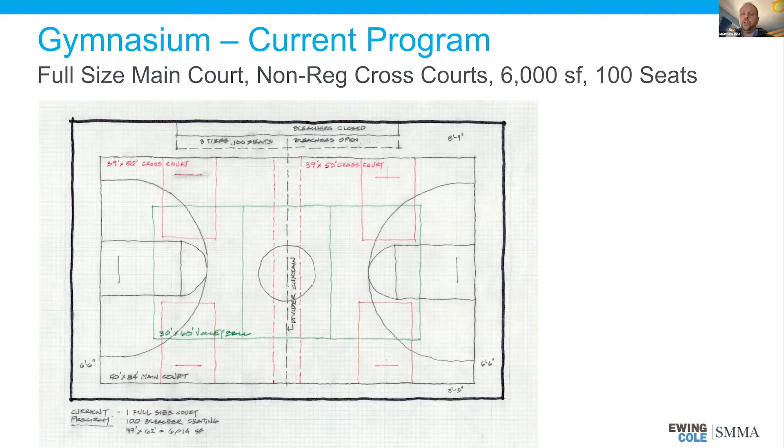So if we just advance through, there's a quick overview of the diagrams of those particular gymnasiums. Again, this is the baseline gymnasium, just so you have a visual—one main court for both volleyball and basketball, as well as some seating. The next option was an 8,600 square foot gymnasium with 2 courts, neither competition on the cross courts, with bleachers included. And the third option, as drawn, has 2 main competition courts with seating on either side for viewing of those side court competitive activities.

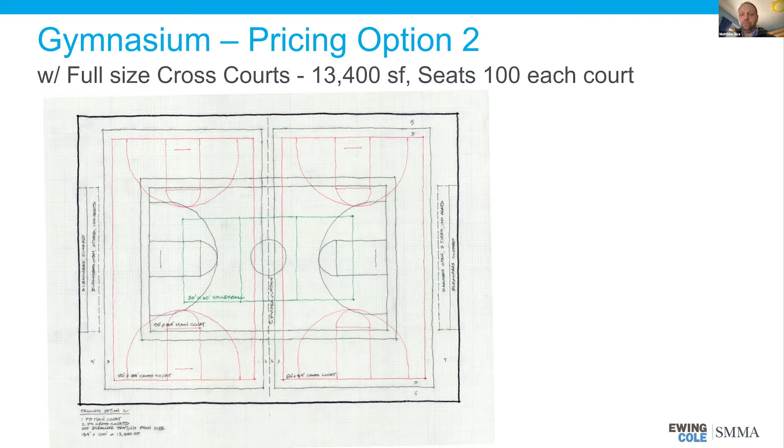So the second pricing option we are going to be holding through the estimating process is the auditorium space. What we reviewed with the leadership group was a variety of options for what that auditorium may look like, its functionality as well as its size.

The first option we were going to consider is a black box theater type environment, somewhere around 400 seats. The 4,000 square feet is a rough target, and that square footage can move up or down depending on how we want the functionality to be - a more flexible environment with a flat floor, potentially without a fixed stage.

The second option would be an auditorium with capacity for one grade level plus staff. This would be a more formal auditorium space with a slightly sloped floor as opposed to steep tiers, timing out somewhere around 275 seats.

The third option, similar to option 2, is a formal auditorium space with a stage proscenium, but would accommodate 2 grade levels plus staff, timing out somewhere around 550 seats.

Just for everyone's reference, it's worth noting we were pulling back from trying to design the auditorium for 700 seats. It was noted that 700 seats would only fit the total student capacity and would not hold staff at that point.

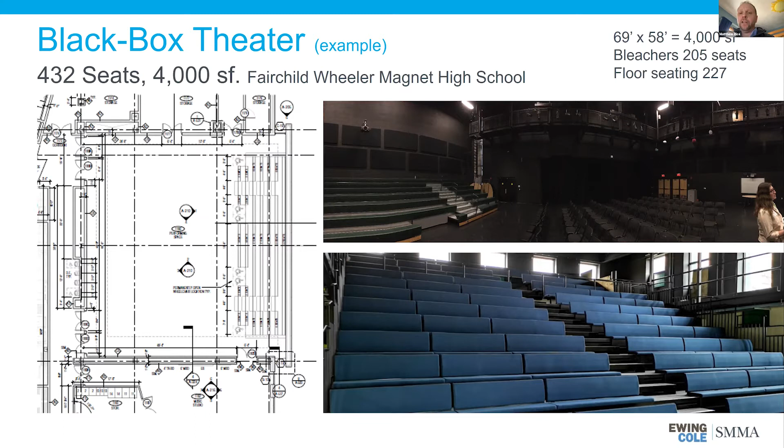If we advance again, you'll see the more traditional auditorium space that folks are familiar with, this one over at Alcott. At a small capacity, this is just 244 seats, but this is more or less the feel of the room we might be talking about for a single grade level.

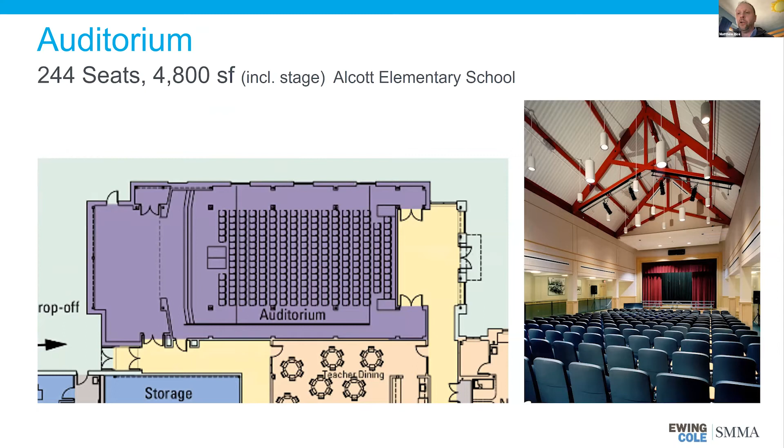And then last, we have that medium-sized auditorium, still a formal space that could potentially hold 2 grade levels at a time.

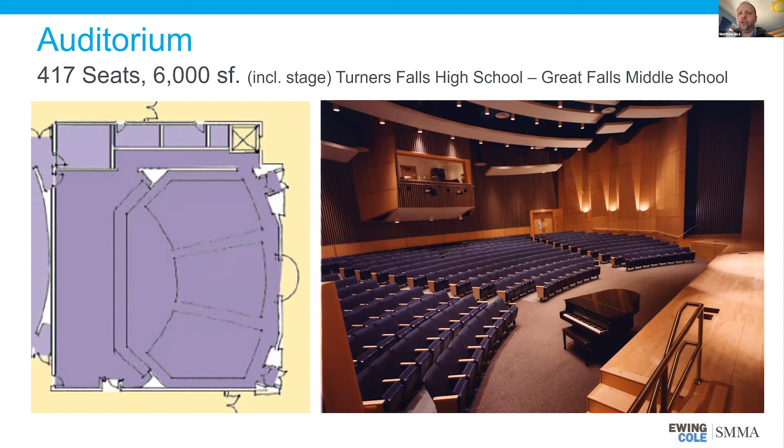If we push through, the one last pricing option we wanted to touch on - there's a lot more detail to dive into on this topic - but in terms of sustainability, we will be running through the cost estimate a variety of upgrades to our already very high level of sustainability represented in the baseline costs for the project. We're also going to be looking at some enhanced sustainability and then certifications to different levels as part of the cost estimating process.

And with that, I think we will proceed into the design portion of the discussion.

I think we might pause for any questions on that first, if we might, Matt. Sure, yep. We just want to make sure we try and leave as much time as possible to go through the design options, since there's a fair amount of material there, and we want to give people sufficient time to really digest and review it.

Good, yeah, I agree. So we'll be judicious with our questions, but I will open it up to the committee. Anything we need to review on that in terms of how we arrived at the information that Matt just presented?

I'll pose one question. Lori, if you could briefly go back to the first slide and tell us about the 3 SPED subsections. Could you give us a picture of that and how the sub-separate programs - is that going to take a lot of accommodation to not impair service delivery, or are you and Justin comfortable that you know what that is going to look like?

Yeah, so we've left the 3 substantially separate programs intact. Those are for our neediest kids, so those programs will have the space they need. What we reduced is what we call our workshops. We had - Matt, remind me - how many to start with? So we had 6 to start with.

Right, so we've cut it back because our vision of special ed, and the work Justin and I did projecting present to projected and really naming the goals we have, is to look at more inclusion and push-in, making that reduction seem really realistic and frankly smart, because if our goals come to fruition, those rooms won't have kids in them the way they often do now. What it does is put us on a pretty tight timeline to make sure we're working with teachers and professional development and working through the progress we need to make. But we left actually feeling comfortable.

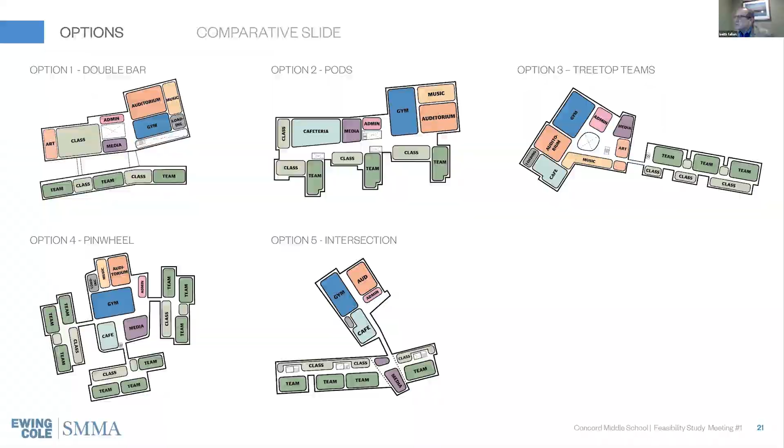Bill, you can go to the next slide, and even to the next one, please. Just to say a couple things - when we showed you everything on February 13th, even though at that time it was not defined as to whether or not there would be an auditorium in the project, we incorporated those within the options that we showed you. So on the left-hand side, the program was nominally 161,000 square feet at that time. We were carrying an auditorium at about 700 students.

There was a recognition that incorporating or deleting the auditorium was not a simple function of just picking that piece out - it would require some reconfiguration of that area of the building. So as we move into the 4 options today, we have assumed that there is not an auditorium in it. As you consider whether that's designed for 250 or 450 or 700 students, a similar exercise would come back where you would have to integrate that in some way, but we needed to be able to keep the options apples to apples and simplify the process.

Because even at 4 options, it's pretty significant. So you can see on the left-hand slide here where we were on February 13th, and where we are today. We have adjusted the footprint so that it is more closely reconciled to the 144,000 square foot program.

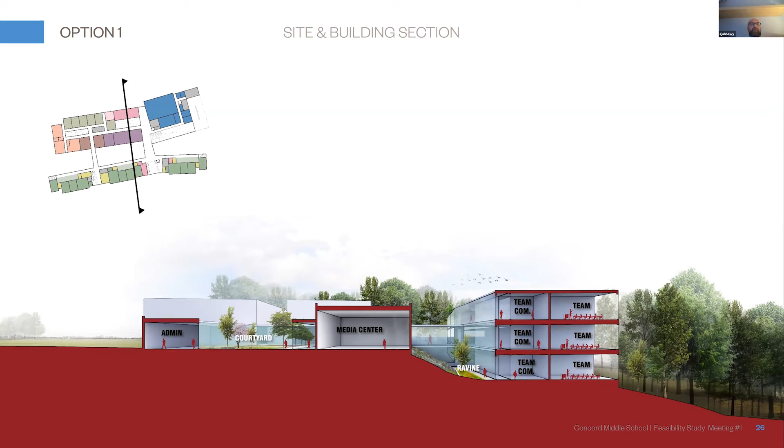So we developed the opportunities here more in relationship to the landscape. As you enter the building, you essentially have a full view through a lot of the spaces to the gym on the left, and furthermore to the cafetorium, which offers a fantastic view down into the landscape with a large amphitheater or stepped seating.

As you enter the building, to your right is a small courtyard that brings daylight to the space. As you proceed into the classroom wing, we opened up that area, allowing a fantastic view into the landscape. This connectivity between the plateau and the landscape becomes a wonderful, almost iconic set of relationships between the public space of the building and the more intimate natural spaces.

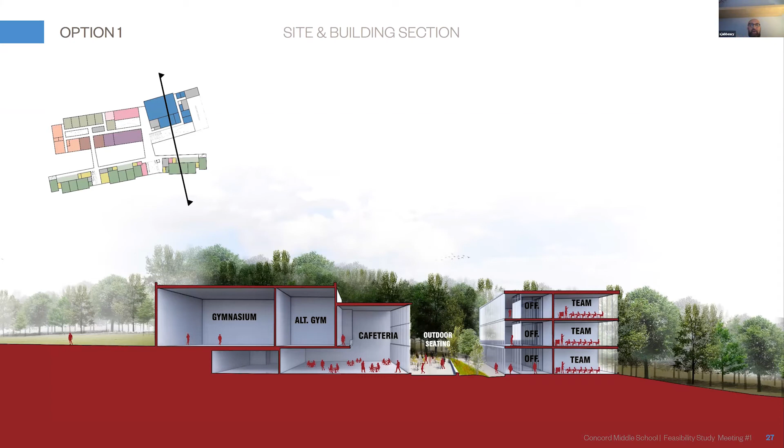Also, with that opening that connects all floors of the building, we're introducing an open stair. If you can go back to the plan, we're introducing an open stair.

Now, a similar situation is along the other bridge. We also widened the bridge so it becomes really a space rather than just a link. You can have seating, multiple functions there, and the whole space began to be a little wider, allowing for creating multiple eddies along that corridor that allow choices of spaces.

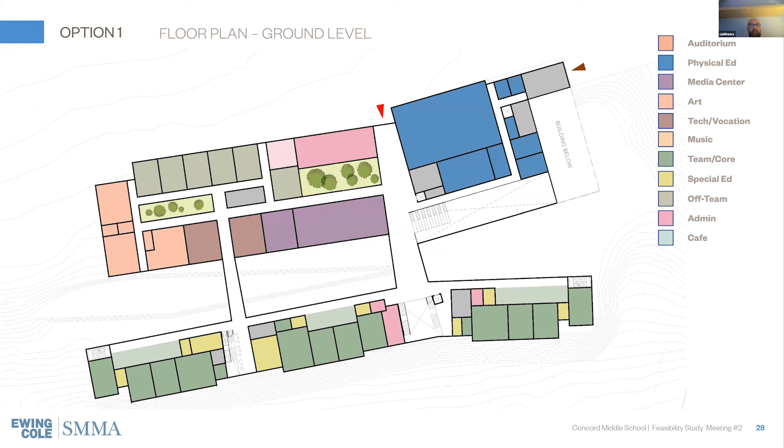The classroom configuration is again much more structured and organized than last time, and you can see the neighborhood for each group gathered around a common team space. The cafetorium is on the lower level with views into the ravine and the landscape, and we located the music rooms right next to it, so there's a relationship between the music classrooms and the cafetorium.

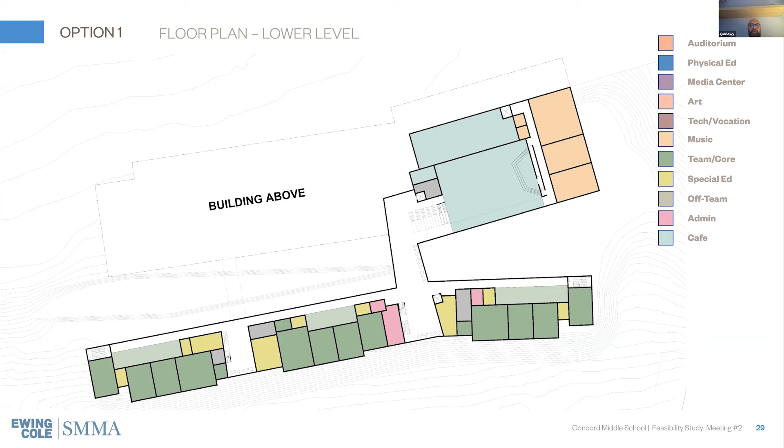The upper level, we can spend a couple of minutes here in terms of the organization. As you can see, each classroom and science classroom is clustered with supporting classrooms and administrative spaces around them.

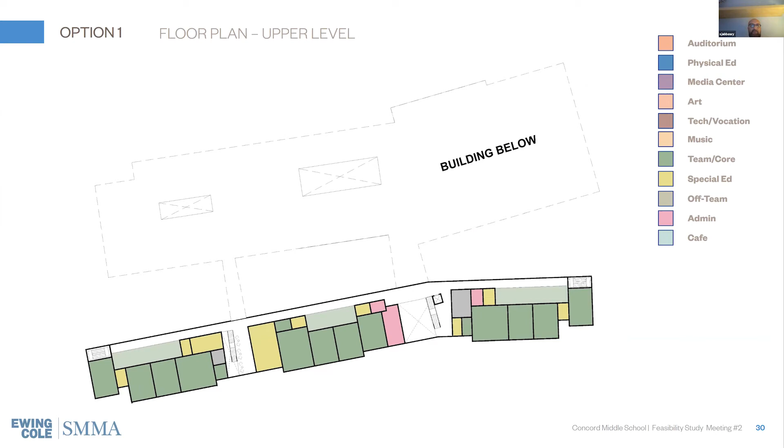So here you can begin to see how this sits in the landscape. There's the classroom bar with open spaces between the teams looking outboard, and it's a wonderful view, while the public spaces of the building face the main street and the public spaces, the parking and the entry.

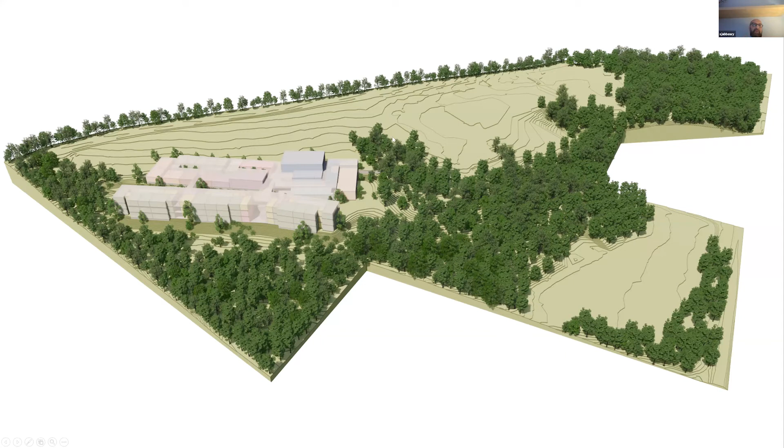You can see in this image the cafeteria is a double height volume with direct access to that courtyard. The northern bridge is a two-story bridge, and it does create two distinct courtyards that could take on a character of their own. So you can see here that we cranked the building a little bit so that the cafeteria outdoor space is wider and it's a flat space.

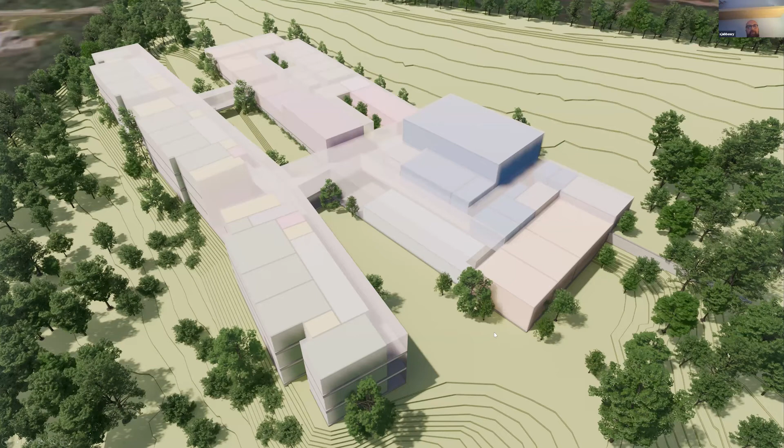And these are the two courtyards beyond. It's actually one continuous space because the second smaller bridge is only on the upper level. So that space can become terraced, a series of wonderful classroom spaces or activity spaces, depending on how you begin to program it. It's no longer a slope, but a cascading series of terraces, and you can imagine the views into that from both the classroom corridor and the other spaces.

Putting the media center there, it's a very wonderful space that has direct sight both to the smaller interior courtyard and also into this larger space—a beautiful daylit space with a lot of transparency.

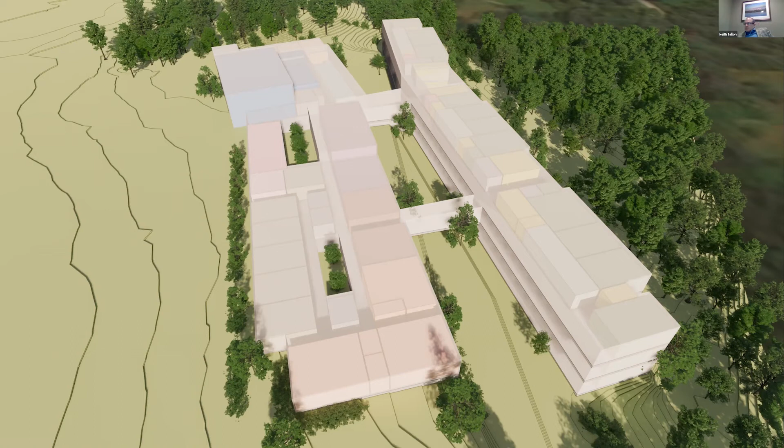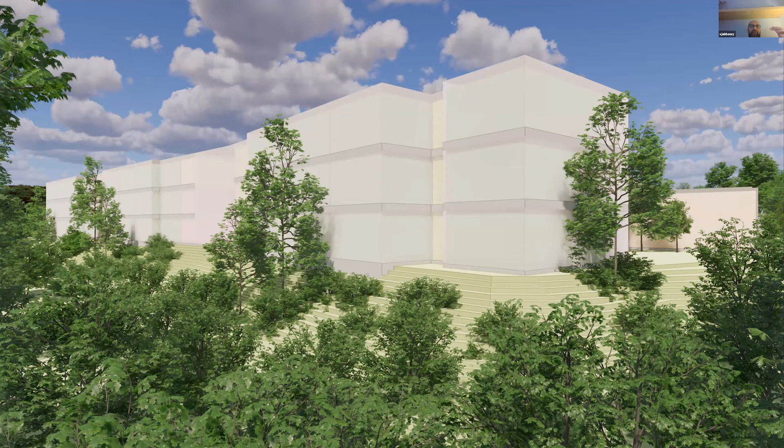This is the view into the classroom bar, and you can see it's a 3-story space. We're beginning to mass or articulate each neighborhood as a volume. One nice thing is that the scale of the bar is reduced by the vegetation, but the entire bar sits on a sloped surface, so it's almost like a promontory, with views into the treetops.

This is the view into the longer courtyard. You're seeing the smaller bridge, and you can see the opportunities in terms of these terraces being incredible inhabited spaces—they can be designed either as learning spaces or play spaces, or just an imaginative place for children to look into.

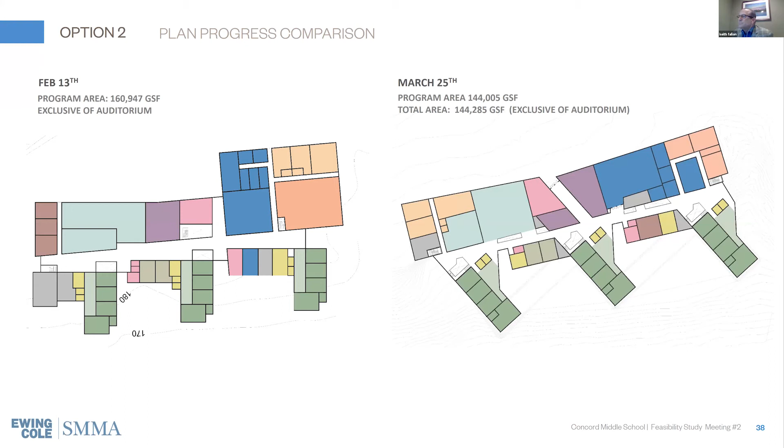Again, this just labels some of the things we were talking about. You do see the workshop rooms right at the entrance to the hubs or the team rooms, a very unique place there.

The south side of the building is sculpted a little bit so that you get lots of daylight into the team rooms, the hubs, and also into all of the classrooms. We've cranked the pods just a little bit so they have a little more north-south orientation, and it occupies the crest of the site, so that the communal piece of the building is a one-story piece, and then the pods are 3 stories and step down the hillside.

One thing I would say is we tried to shrink the drawback in the scheme, which is the distances between each team and the next team. We tried to shrink it, but given the configuration of the scheme, it's very difficult. So in this scheme the teams are slightly separated from each other, making class identity a little bit more difficult. Yes, that's a fair distinction. The other thing, though, is that the off-team classrooms are maybe a little closer to the teams. Yeah, so that's a legitimate distinction.

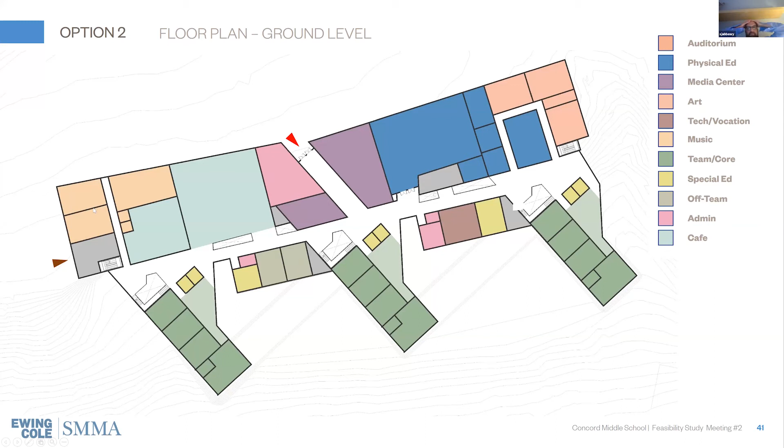So just a minor point of clarification, on the left-hand side those are the music rooms that can support the cafetorium, and the art rooms are on the right-hand side. Yeah, sorry about that. No problem.

Next. So at the lower level, that corridor becomes a corridor, or truly a corridor in a sense, and then to mediate that.

We kind of created these niches where you can have some public seating in there, but along that upper wall, essentially there's no daylight because you're kind of buried into the ground.

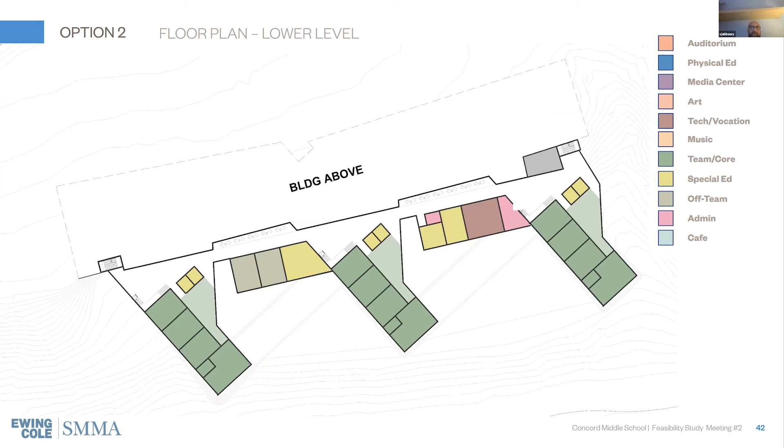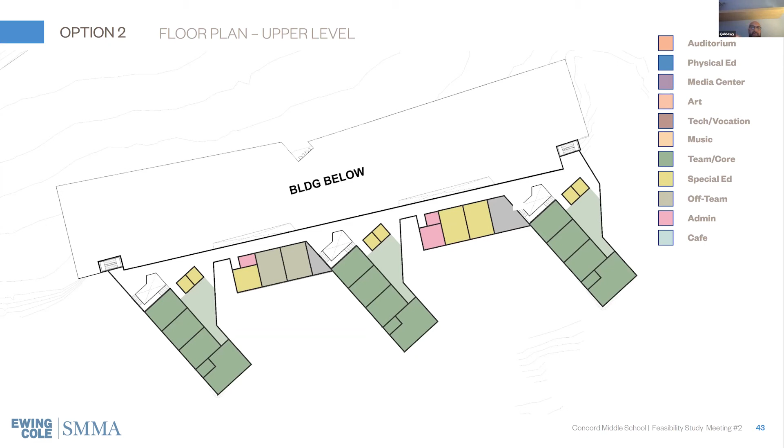Okay, that's interesting. The third level, the corridor becomes glazed because it looks into the northern orientation. And again, you have these spaces that connect up and down the different pods, right? So you have that vertical connectivity, and those spaces and their relationship to the team room is really what makes the scheme interesting. You can see here it's much more of a solid building.

Next. Oh, I see, and you're looking into the classroom.

Against the cafeteria and gymnasium, that corridor almost becomes bridge-like, and you have connectivity between the lower level and the primary level, and then the opportunity for daylight coming in at that point as well. Okay, and next scheme.

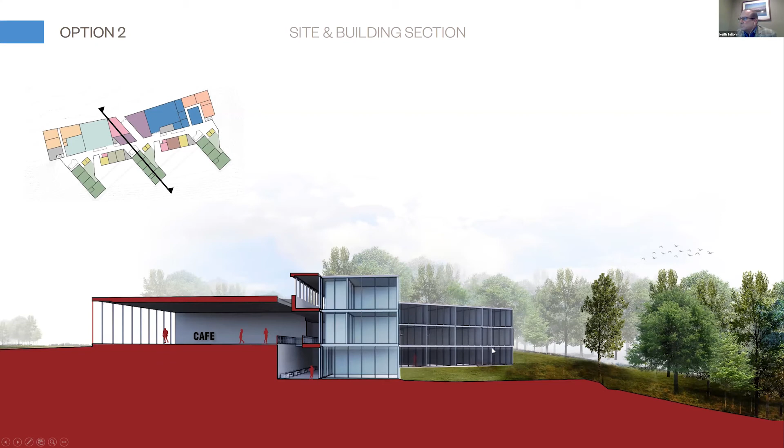Next scheme, Bill. So you can see here that these classroom pods actually create these fingers into the landscape. And again, in between them, there are these terraces that can be occupied for any purpose, whether it's play area or classrooms, and the terraces overlook the slope and the vegetation.

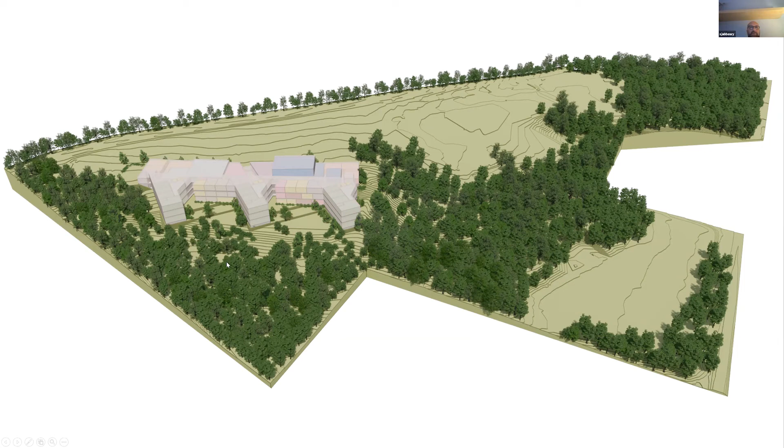Next image, Bill. Saul, I think you have a bit of a delay. Yeah.

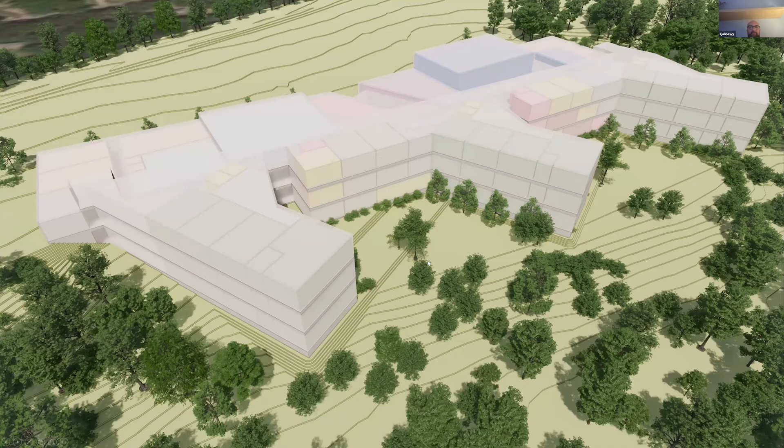And this is the front, the public space, and it almost becomes a street-like view with the different heights of the different functions that could be articulated as a level of interest. But it still is a pretty continuous long surface.

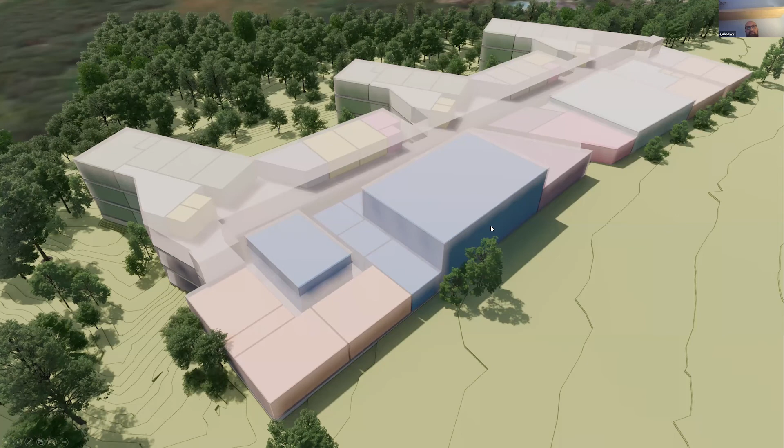You can see the auditorium here. Next image, Bill. Gymnasium there. So, sorry, the gymnasium. Next image. So, option 3.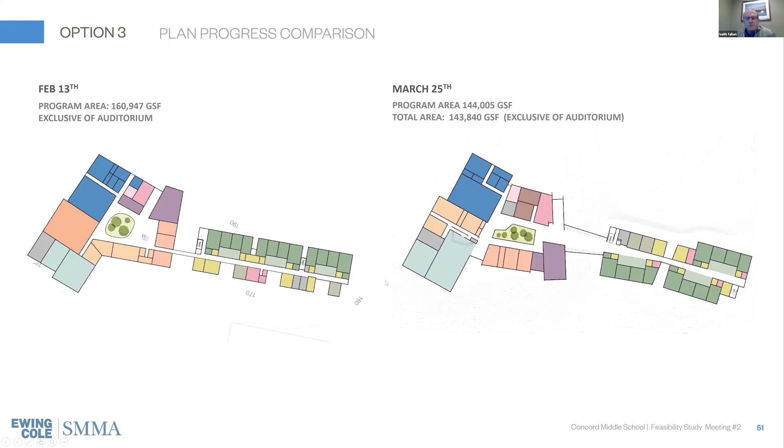Sure. Yeah, option 3 is a linear arrangement that we called treetop teams. If you compare the footprint, one of the things we actually learned from the pinwheel relative to the configuration of the teams, the classrooms, and being able to integrate some off-team classrooms more closely, and maybe have a completely integrated team there. So you can see toward the right-hand side of the right diagram, we've adjusted that a little bit. We worked on the organization of the more public component, which is on the left-hand side of the diagram. And if you remember, that piece sits on the upper plateau.

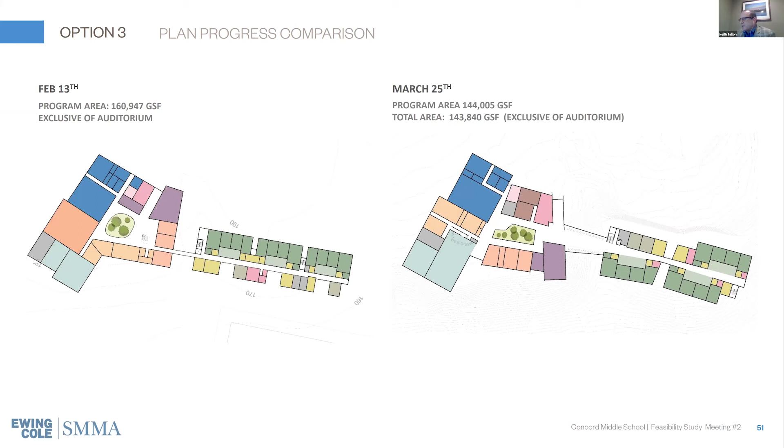There's a bridge connector that then connects to the team classrooms. We've worked on making that a lively place that has the opportunity to support collaborative learning and small group gathering spaces. And then that connection is on the main level, which becomes the second level of the classroom bar, and the landscape slides under that bridge to make some very interesting dynamics. At the middle of that educational bar, we've introduced a few opportunities for daylighting and also reinforce the geometry and configuration of the teams.

Keith, is the purple the library? Yes, it is. Immediately, the purple across is the library. The light blue is a cafeteria. The darker blue is our gymnasium. Correct. And the kind of salmon color next to the library are the art rooms, and then next to the administrative suite is the digital learning and those kind of science and technology rooms. But the off-team classrooms, which would be language arts and those other things, are the grayer, more olive color, which are immediately proximate to the typical team.

So in the treetop site, the way the building sits on the site lends itself to an organization where the bus access comes in across the face of the building, then does sort of a hairpin turn. I don't know, Bill, if you can pull up your pointer to try to explain this. Yeah, it comes around, and then when it gets to the intersection by where the corner of the soccer fields is, the buses would take a right turn to exit again the site from furthest to the north.

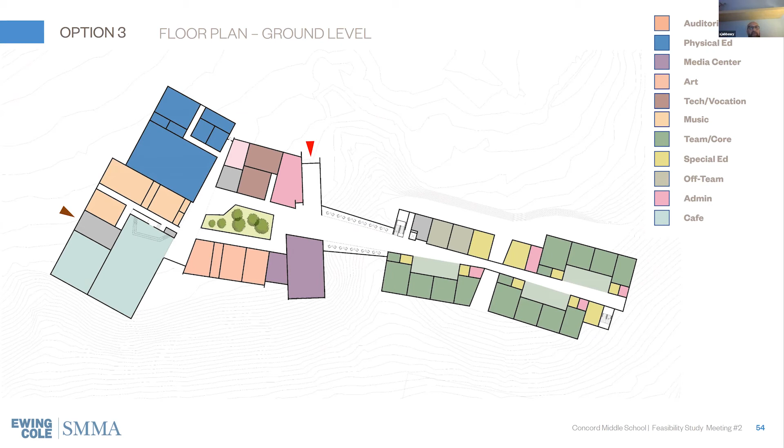The media center is really immediately at the center of it, but also has spectacular views, and so is the cafeteria. The advantage of this cafeteria is it's really kind of conveniently located next to the service and the kitchen, and it overlooks the landscape, but at the same time, it's a little bit farther away from the classrooms, from the teams. Next image.

This is the lower pod of the classrooms and the upper level of the classrooms.

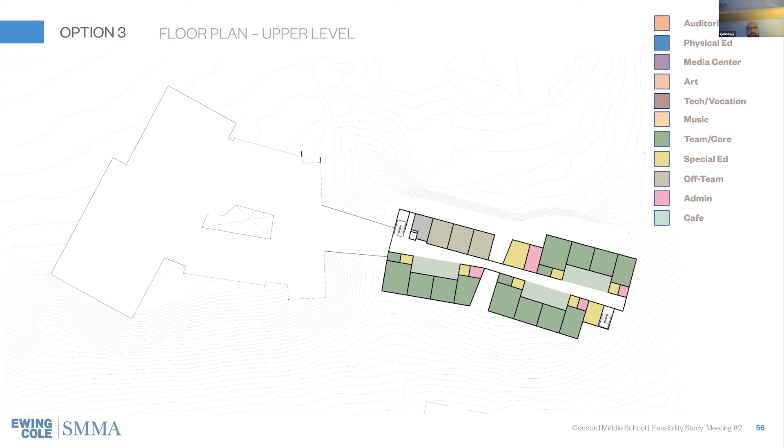Next image. You can see here the section elevation, and you can see how that bridge begins to create this really interesting connection where the landscape really slips into under it.

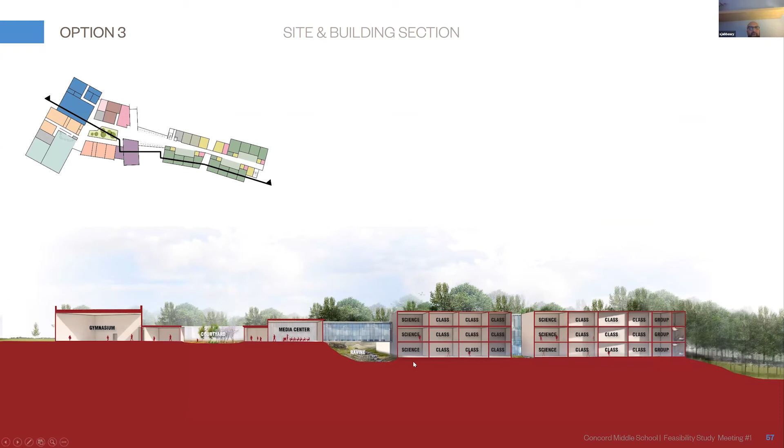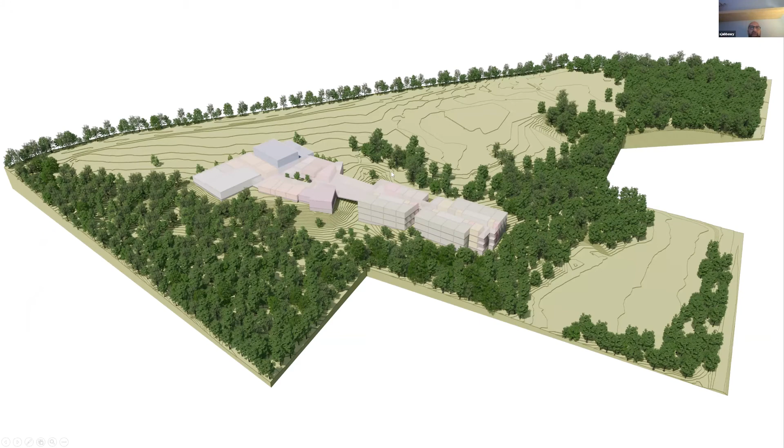Again, the classrooms are really tucked into the trees, so that's what we call the treetops. And the upper part of the public part of the building is beginning to mediate between the plateau and the sloped landscape. You can see the gully moving through the building, creating this really fantastic feature. However, what's interesting about this scheme is there are less terraces and outdoor public spaces for learning classrooms and other functions.

A closer look at it. Next image. And here you can see the public face of the building in relationship to the masses. This would be the entryway.

And what's nice about this is that unlike, let's say, scheme number 2, it has a very limited facade in the sense that the public face of the building doesn't stretch forever. The bridge and the classrooms are kind of tucked in. So the building itself, by using the slope, begins to be smaller and in a more appropriate scale for the site.

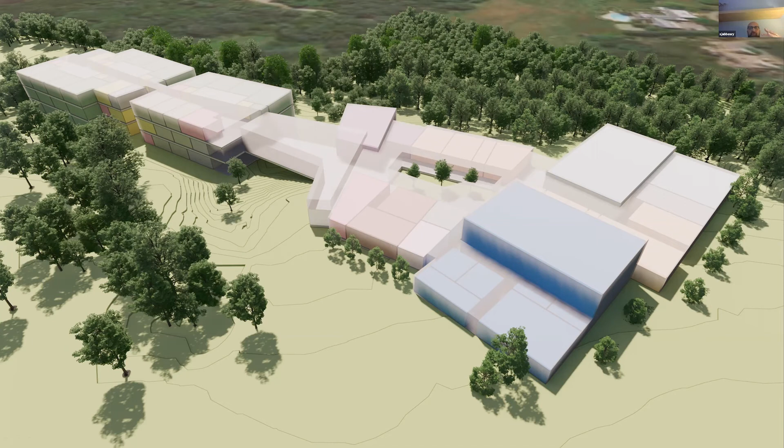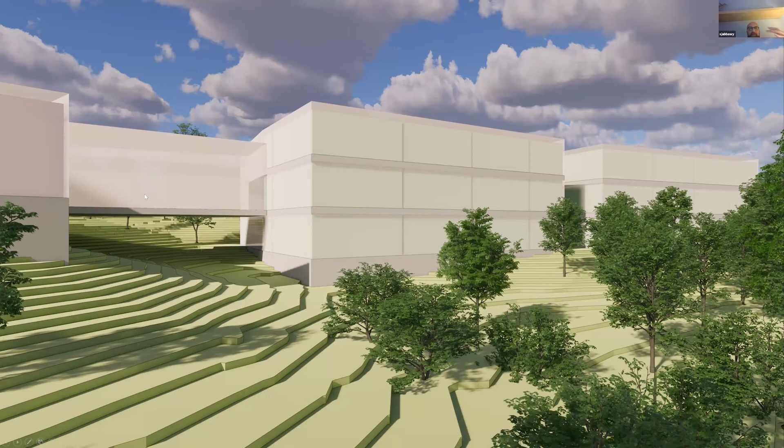And you can see here the landscape is slipping through and the public bridge, the multifunction bridge. Next image.

This is, again, kind of the entryway to your right and its connection to the bridge. So you can imagine what a fantastic experience that could be. And the classrooms are further remote.

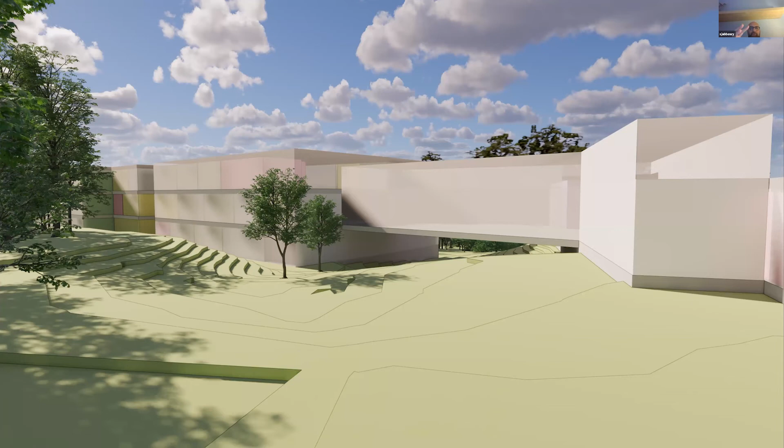So, and then finally, option 4 is the pinwheel. We're trying to work our way through these options fairly quickly, but still give them their due time.

Bill, if you can go to the comparison, you can see we've maybe been most aggressive in our adjustments to this scheme. Because we were so cognizant of the amount of ground area that it covered with the 3 distinct pods, we have taken what was formerly the east pod and put it on top of the west pod. So that is now a 2-story connector.

It lightens the footprint on the grade. The southern lower pod is 1 story down. Again, that steps into the landscape. One of the things that this does is creates a great opportunity to have an inhabited roof deck on top of the southern pod, because that is now at the same elevation as the primary gathering spaces.

Again, the building organization in terms of the driving concepts that you see within all of the options is that the gymnasium, the media center, the cafetorium, those are all immediately adjacent to the public entrance and easily accessible by that. And then there are strong visual connections to the educational wings, but yet they are clearly defined and easily accessible.

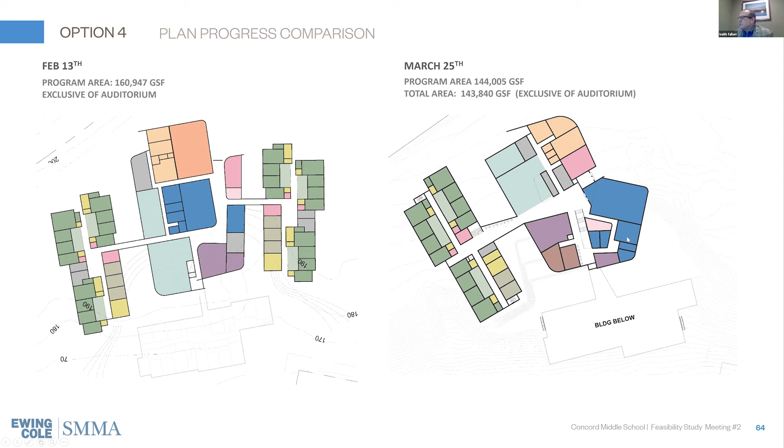This creates some opportunity to slope down the hillside like the others did. There is a small lower level that includes the art rooms. We can move to the next one.

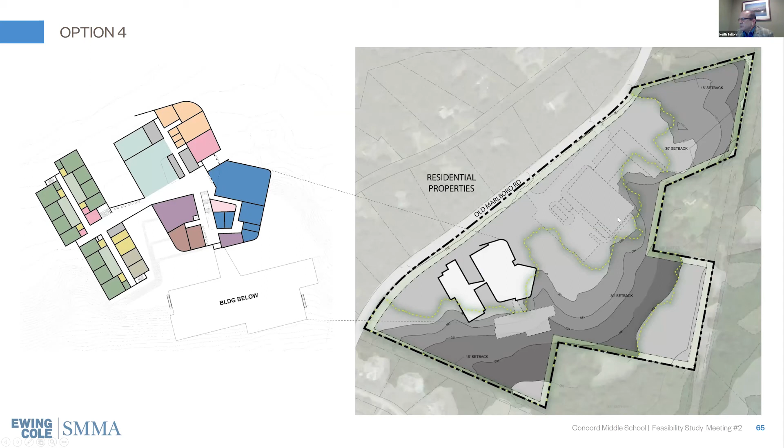Again, you can see where it sits on the site. A lot of the same principles we've been discussing thus far. Great courtyard opportunities within this option as well.

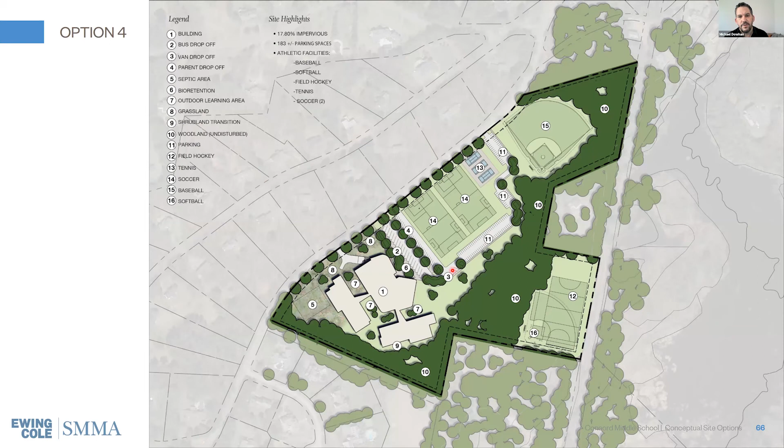In terms of site organization for this option, the vehicular circulation organization lends itself to wrap around an internal area where the vast majority of the athletic program would be. The bus entrance and parent entrance are parallel to each other but still separate. They both wrap around, and it's still a one-way circulation pattern where you exit furthest to the north. This one also allows us to accommodate a separate loading dock entrance for trucks that we can buffer through the landscape.

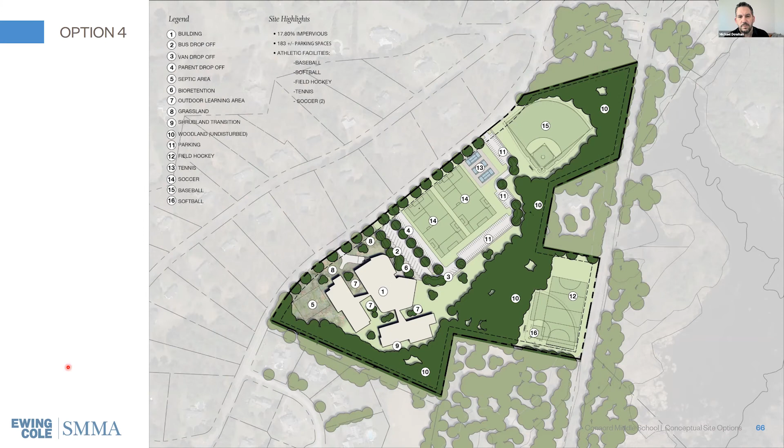What this scheme does, which the others don't do as well, is begin to cluster things. The middle triangle in the public areas can become almost like a town square, where from one location you can see the media center, the gym, and the cafeteria, which is really incredible. It could have skylights, and it could be absolutely wonderful.

Within a very short distance, you can get to the heart of each class. The scheme essentially eliminates what we'd call the longer corridors by creating these series of clusters. The experience could be really wonderful. Imagine coming in, entering, and being in the middle of this town square. So there's a sense of centrality.

But as soon as you begin to walk into the bridge, you see these cascading courtyards in between the main public building and the classroom and team wings. Again, we wanted to make the bridges a little bit more than just a bridge. We wanted to make them a place, so we widened them.

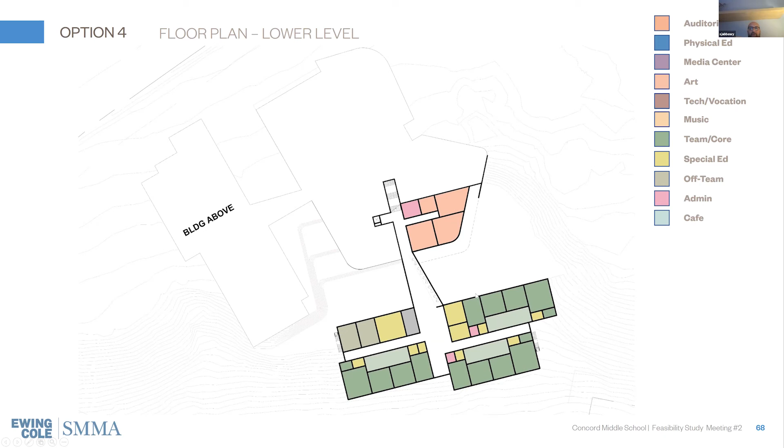This is a lower level, and again, when you come in, you can immediately descend to the lower level, and the art classes are on the lower level because then they can have an art porch where they can do outdoor work. The classrooms for the teams are very close to each other, but enjoy their own team space. If you can go back to the image, Bill, for a second.

One of the nice things about this is the ability, for instance, if you're coming in from the outdoors and then you turn to the left to see into the lower wing, you can see right through that space into the roof garden there. And that could be really, really fantastic.

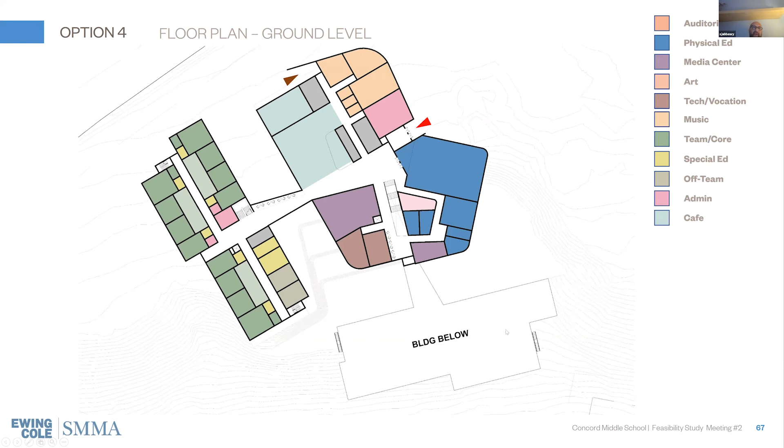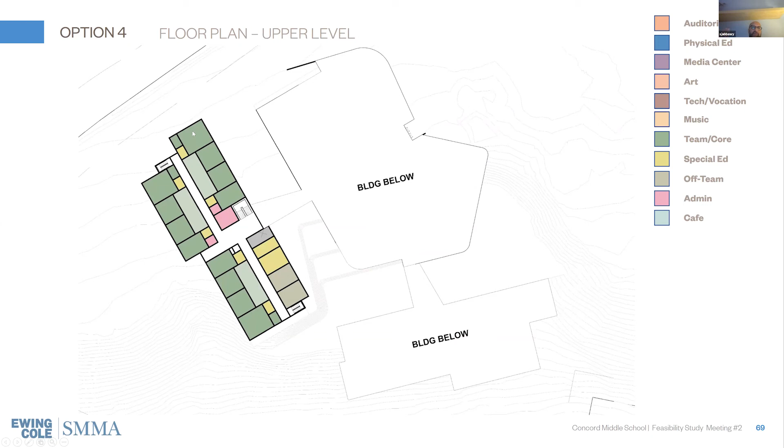Next image. You can skip that one. That's the upper level of the two-story wing of the classrooms. You can go to the image, next image.

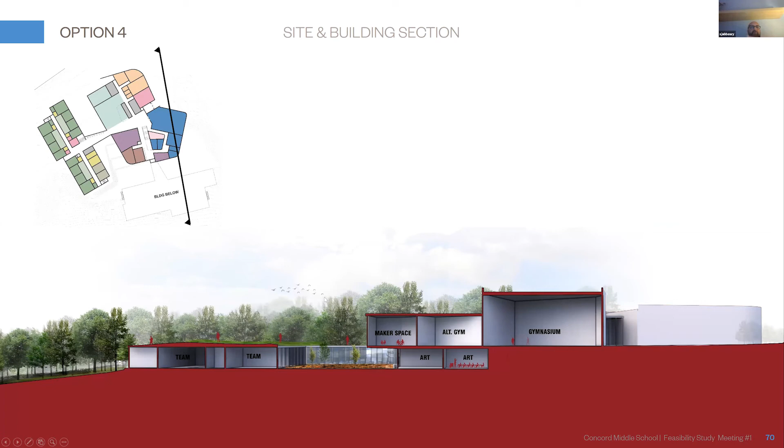You can see here the relationships between the entry and the roof garden. The idea of coming in and walking that roof garden, overlooking that landscape. And again, that could be classroom areas, could be play areas. It could be many things. Next image.

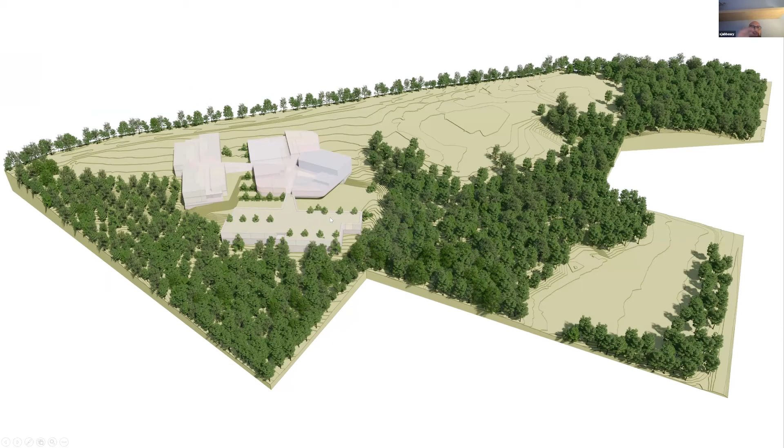In here you can see the lower wing is the roof garden, so you can barely see it. And you can see the clustering of the public spaces versus the two classrooms that look into the landscape.

Here you can see the wonderful quality of the spaces in between the classroom buildings and the public spaces. The cafeteria has its own courtyard on the upper left. The media center has its own views and its own courtyard, its own terrace. And as you cascade down, you have multiple terraces that begin to be used for any purpose that we would develop later on.

And you can see again the roof garden, which really is not developed at all. We just put trees in there to indicate that it is a roof garden. Next image.

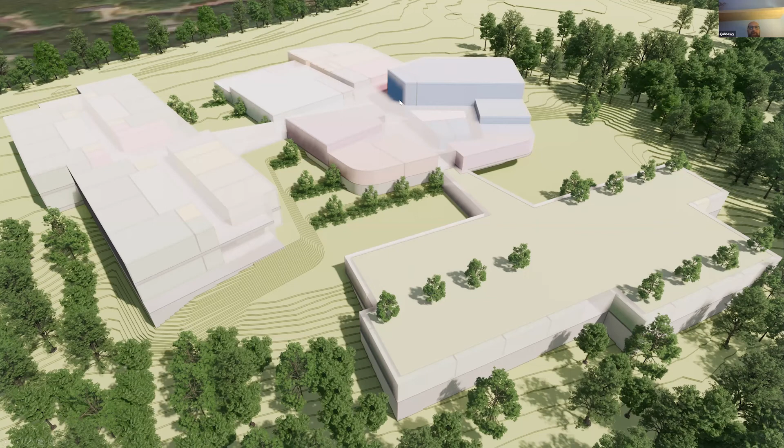The variety of spatial experiences here is pretty immense. Here you can see essentially the entrance and what's called the town square as the lower space, and that could be completely skylit if we wanted to.

One of the nice things about the public face of this building is that it begins to create an L shape, so it's a little bit more welcoming. It's a bit of a hug in terms of the entryway.

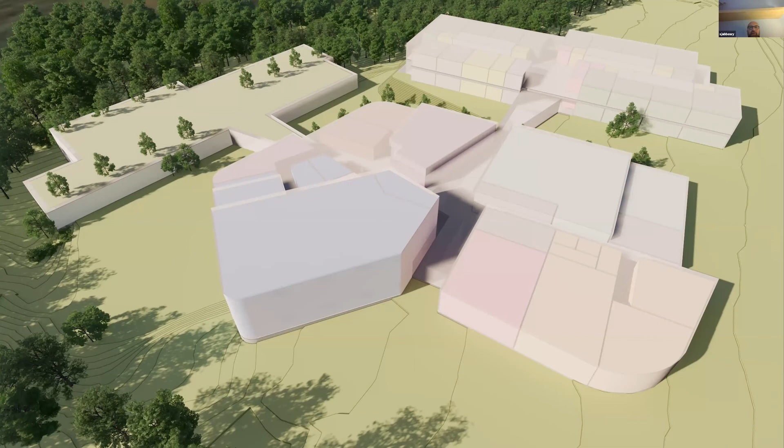You can see here the lower level. Go back. I'm sorry, go to the next image. Sorry for that. No, the other way, the art porch. Yeah, you can go to the art. Previous image, Bill. No, two ahead. There you go. Yeah, here we go.

So you can see here the relationship between the art classes and what we'd call the art porch. It's really a nice space. It's sheltered, but it also opens to the landscape. You can also see further down the bridge to the lower classroom group.

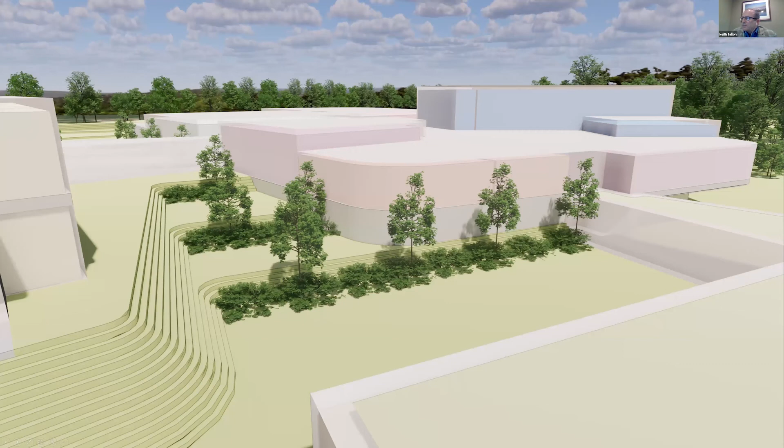And I think we skipped one image, right? No, we've hit them all. All right, perfect. So then we have a couple side-by-side comparisons.

I know it's a lot of material to cover, but we've done that, even eliminating one of the previous five options. We think that each of these have different weighting criteria. Maybe not so quickly through those just yet, Bill.

But in terms, if we go back to the plan right here, and then to the views within the landscape, the dimensional models within the landscape, they contain these evaluating criteria we talked about: fidelity of team, proximity to outdoor classrooms, opportunity for engagement of outdoor learning, some of those things. So we hope that evaluation criteria we put in there helps you see how you might look at these various options through that lens.

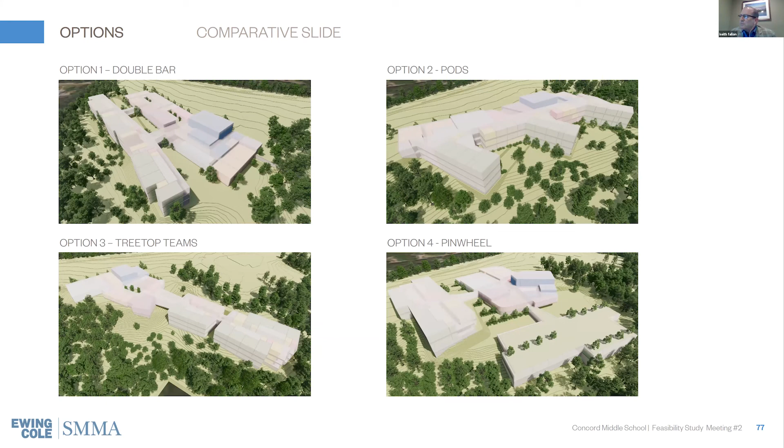The analysis of the site pieces came in a little bit late. We are working all of them, Michael, to nominally 175 or 180 spots. I do think the site coverage ranges a little bit, maybe from 17 to 19%, which is slightly above what's allowed by the township at 15%.

We did think maybe there's an opportunity to use some pervious paving within the parking stalls, not the drives, to help get that down. This preliminary site coverage data is incorporated on each of the individual slides.

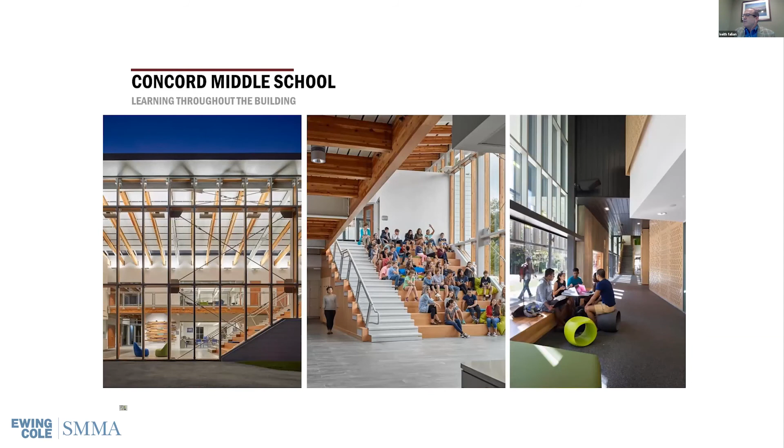I think, Court, I'm ready to hand it back to you in terms of how we might want to work through a comparative slide. One thing we did do is add to the back of this slide deck the series of precedent images given to us as part of the visioning, because we thought that communicated a level of quality and expectation that might be important to the cost estimators, so they have some understanding of the expectation for the interior fit-out, the quality of light, the character of the spaces, as they compare that with the quantitative data, the relative massing of the buildings — things that communicate expectations for level of quality.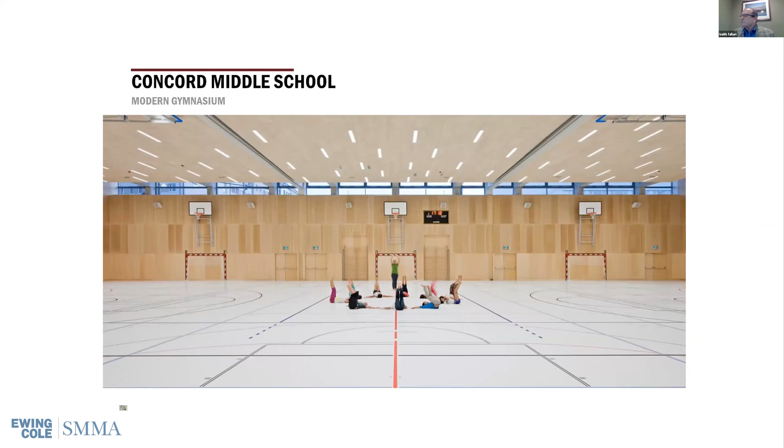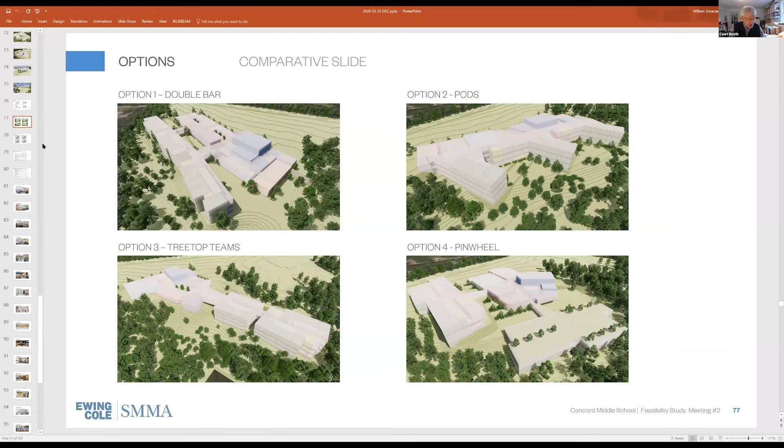Thank you, that's a lot of material. I think the first thing we need to do is a time check. It's 5 of 3, and I wonder if the committee members want to extend another 25 minutes or so, though that wasn't the original expectation. We've learned a lot; we can carry it forward individually and see what comes out collectively tomorrow morning, or we can hang in there for a few more minutes today.

If I could do a quick check in with people — Lori, you've got the most on your plate with concern for kids and families right now. What's your time look like? I'm 10 minutes late to another meeting already. Okay, sorry. All right, so given that, you wouldn't say that if it wasn't a meeting with equal or greater priority.

Correct. Well, I don't know that you couldn't continue to deliberate on some of the pieces we've talked on and continue without me. Jared, you're still on, right? I am still on. So Jared's here and can loop back in. I might be able to pop into the other session. Very good, come back. Okay, Dawn?

Sorry, I had to unmute. I'll be honest, I could do it, but I've literally been in meetings since 10 a.m. and my kids are having meltdowns. It's the 2 o'clock meltdown time that's been consistent for the last two weeks. So if we can be concise, I can probably do 10 or 15 minutes.

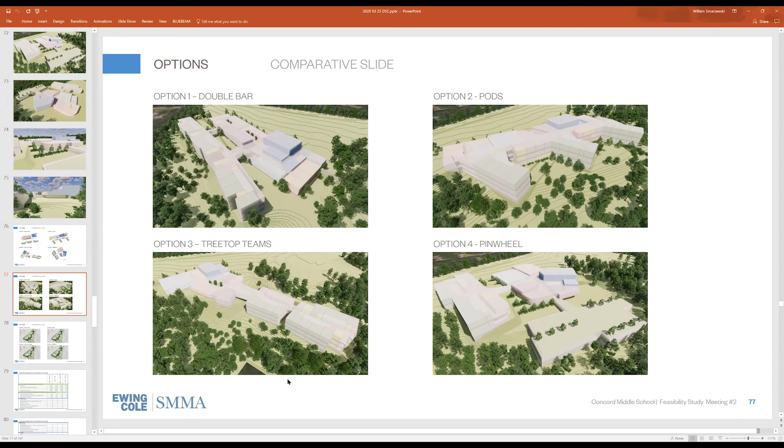My two cents on that is, why sacrifice the great natural light for what we're trying to do if we can accomplish it in another design option. That's my thought on that.

Well, from where I sit and when I design buildings, I do not give up on building orientation. You cannot go back and change how a building's placed on a site. So that is one of my top goals when planning a new building—it doesn't always look awesome on a site plan, but I always try to get classrooms north or south facing.

Yeah, unfortunately, the pinwheel by its nature would create at least one part of the building with a not great orientation. It has been rotated on the site a bit to improve orientation, so they're essentially arrayed around the sun path, comparing it to true north in the site plans here.

But we have two stories of it facing east-west, right? That's the two-story wing. Correct. So you have two-thirds of your classrooms with not ideal natural daylight. Just my two cents on that one.

And I know it was favored by others for other reasons, but if we're trying to have one of the most sustainable buildings that we can have, my feedback on this particular option is it's not ideal from an orientation standpoint. Other comments, questions on pinwheel number 4?

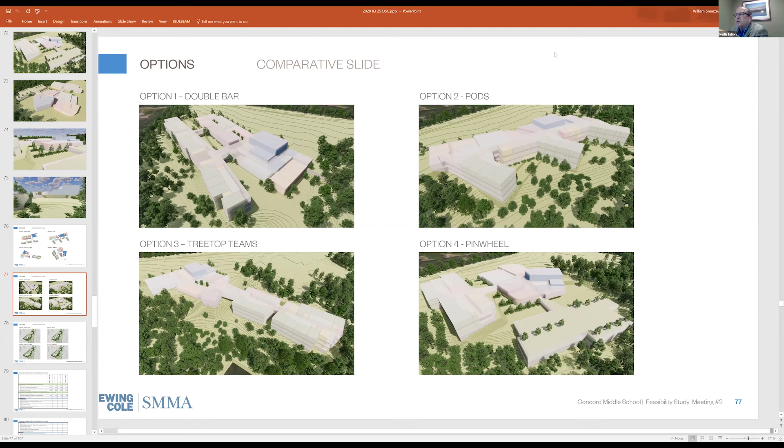I think it's quite compact, but it doesn't run a big line into the woods, so to speak. It doesn't do that. So, Bill, could you just go to image 78? We just want to look at the side-by-side site plans the other way.

The other point about option 1 is it's got a good entrance, a good access point, and it makes sense functionally in terms of its presentation to the site, so to speak. I thought that was another kind of benefit of it.

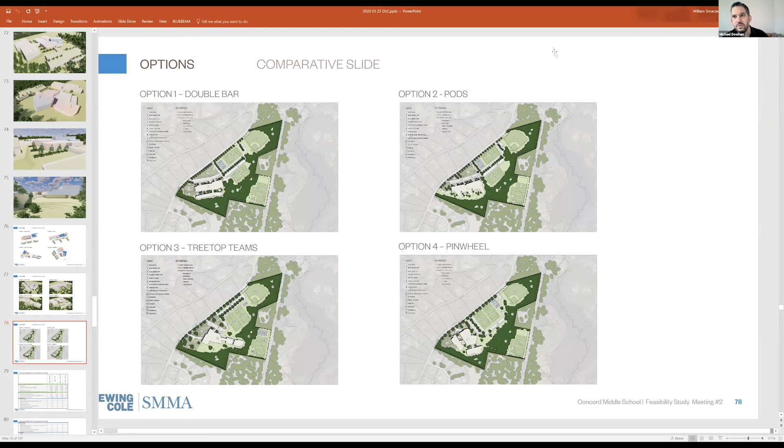If I could for just a moment, for option 2, the pods option, from an exterior landscape perspective at the south side of the building, option 2 is the only one where those exterior spaces really embrace the hillside and the natural landscape.

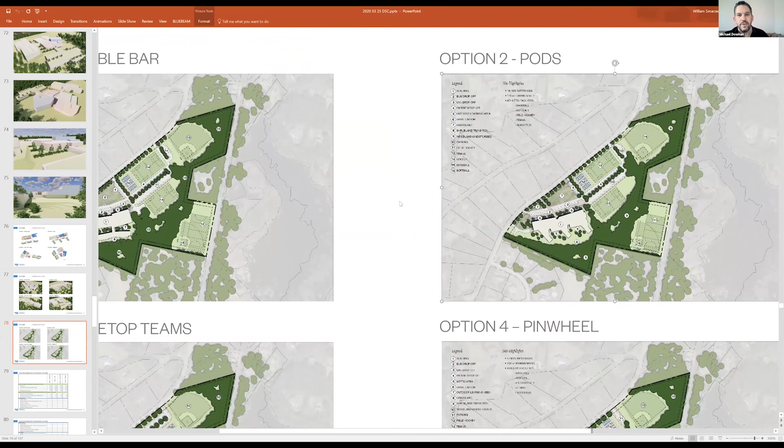Option one has a lot of obviously natural light for the building, and we're creating this really neat ravine in between the two buildings. The treetop option has sort of similar things, but option two, those spaces in between the classroom wings, that's the only one that really extends the man-made landscape around the building directly out. You have a direct connection into the hill and the natural landscape. That's one of the really interesting parts of that.

Yeah, but I think we can also develop that, frankly, for option one. Oh, absolutely, we can create kind of a terrace landscape along there as much.

If we do that for option one, you'll have three different kinds of experiences. You'll have an urban experience when you drop off, sort of an in-between, more tucked in, beautiful, almost river-like landscape with the bridges. And then you can have a cascading landscape in the back from the classrooms. So in a way, we just didn't illustrate that, but we could do both.

One of the nice things about the south side of option one is that if we're careful with the grading and how we expose the foundation on the back side of that building, we can really hold the existing tree infrastructure really close to that building. So when you're in those classrooms facing south, if we're careful with the grading, you're going to feel like you can reach out the window and almost touch the branches of some of these trees, I think.

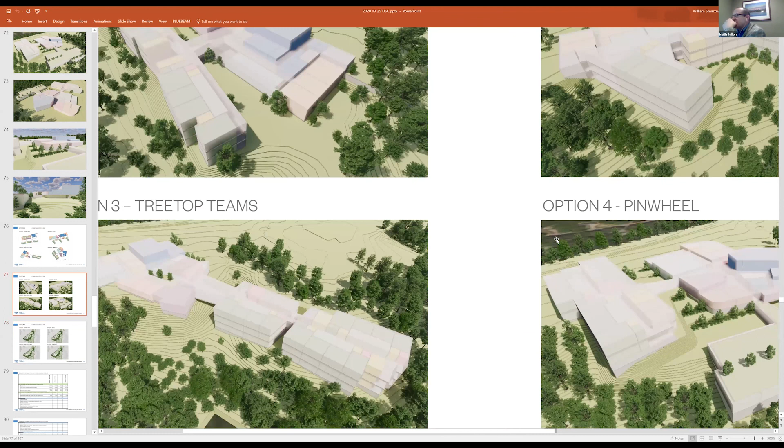Okay, I don't want to dominate the discussion, I want other people to get their chance to chat. But on this shared wall business, I think you've got a little bit more shared wall space in option number one. Bill, please go to the plan comparison, slide 76, and show it full screen.

I'm sorry Charlie, could you repeat that point again? Well, it seemed that there was more wall space, shared wall space in option one than in option two, but I may be wrong on that point.

I'll be interested to see what the enclosure surface areas are. It seems like option two should be the lowest, and by how much is the question.

This is Matt. Dawn, before you leave, I'm curious your thoughts on option three and that one classroom furthest out there facing north, whereas option one and option two have all the classrooms with more equal visibility. Do you have an opinion on if that makes a difference?

We may have lost her. Let me check. Okay, let's stick with option... Go ahead Dawn, the question from Matt is, option number 3, we've got that one pod that's north facing.

Yeah, those will be great classrooms. They'll have nice, natural, consistent light throughout the day. There really shouldn't be, as long as they're the same size and equity from a program standpoint, those will be great spaces. So the fact that 2 are south facing, 1 is north facing, not an issue. In my mind, they're not.

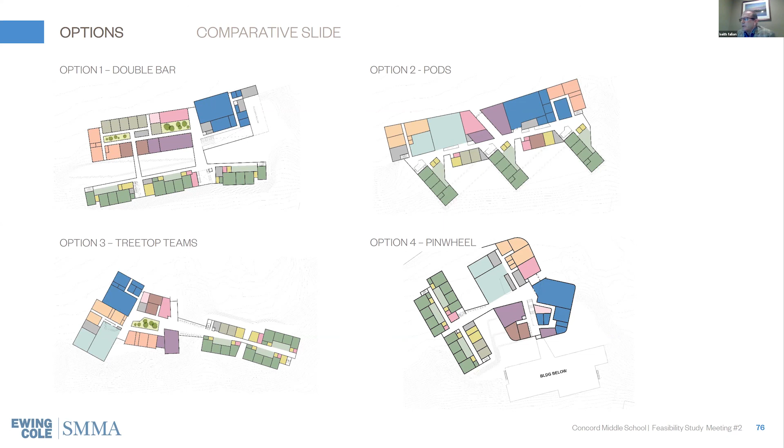I was saying equidistant from the team rooms to the front cluster - you get more, it's more equidistant and easy to access in option 1 and 2 than in option 3. Option 3 you have it gated, and you've got a big run for anybody that comes in the front of that building to go to the back, the rear, to get to the third team pod. Maybe that's not an issue. I was going to say that could be seen as good or bad. Yeah exactly, it could be seen as good or bad.

Similarly with the cafeteria and some other spaces. Let me propose the following, and I'll entertain any proposal - we can do no more deliberation unless we're together today or tomorrow morning. Might a way forward be that we propose to Tim and Dawn, hi Dawn, that tomorrow morning each of us be permitted 3 minutes to give our pros, cons, questions about each of the 4 options, as a way to help set the table for tomorrow's agenda. Would that be workable? Would that be helpful, Dawn?